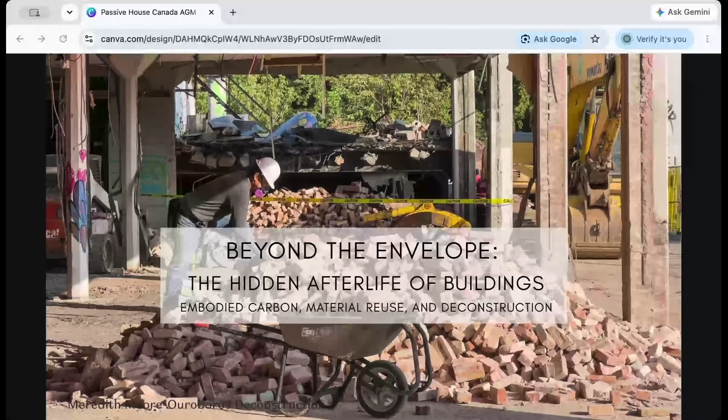I'm Meredith Moore, founder of Ouroboros Deconstruction in Toronto, and we take buildings apart. Most people think that's pretty much the bulk of our work and the most interesting thing, but over the last few years, I've become much more interested in what's happening outside of the deconstruction, what's happening before and after this slow demolition process, what gets saved, what's getting thrown away, and what happens to all of the material and value already embedded within our existing buildings.

So I was excited to speak with everyone today because the Passive House movement has done so much to advance the conversation around building performance and operational carbon. And tonight I want to reframe it a little bit, and talk about a different piece of the puzzle: embodied carbon, material reuse, and the hidden afterlife of buildings.

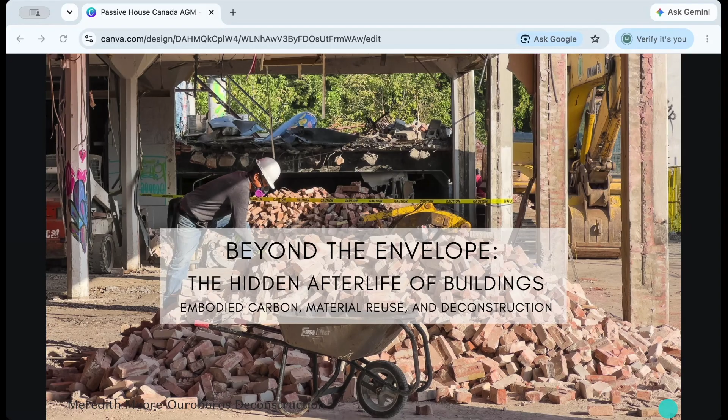So we all know we have a little bit of a problem when it comes to demolition. Commercial demolition is one thing. Residential demolition, which our firm specializes in, is completely different. In Toronto alone, there are about 2,700 residential permits pulled each year, and those are just the permits that are pulled—a lot of work gets done without permits.

To put that into perspective, a single 2,000 square foot home can generate about 140,000 pounds of waste. Much of that is perfectly reusable wood, brick, and other finishes and fixtures. And that 140,000 pounds of waste is equivalent to about how much one person will produce in their entire lifetime.

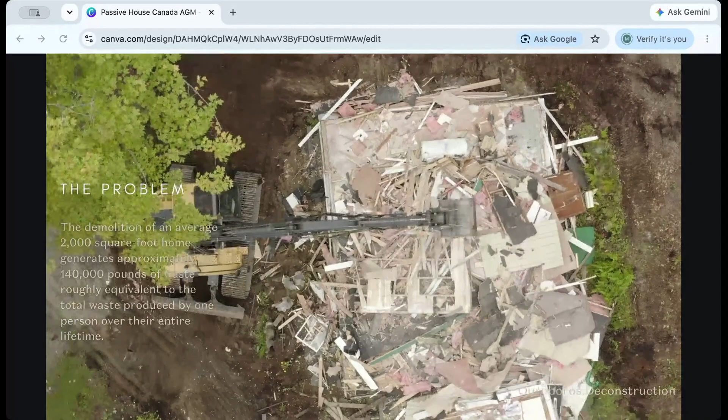While we often focus on the carbon associated with new construction, each demolition project that gets us to that new construction really represents the loss of materials, the labor, the energy—all of this embodied carbon that was invested in the building originally. This volume of waste isn't just economic loss, it's a missed opportunity, and it requires us to use more virgin material.

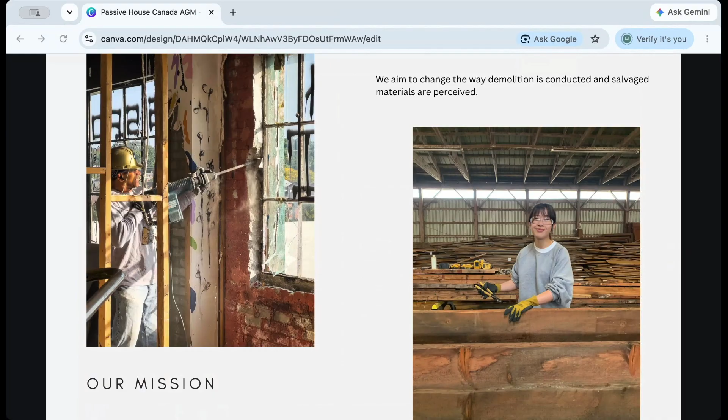In our work, reuse can't be an afterthought. It has to be considered from the beginning of the process.

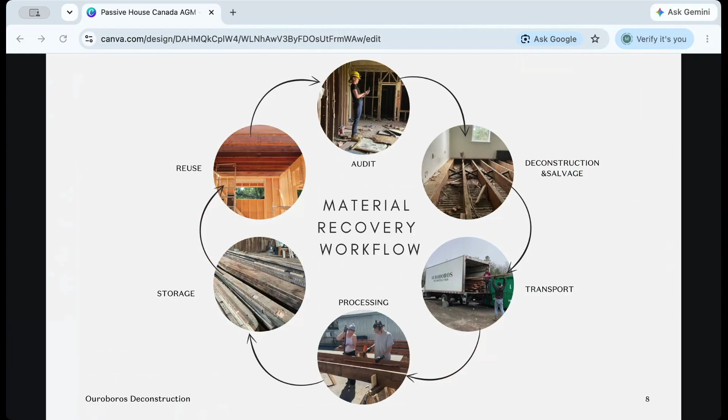We started out primarily doing interior deconstructions, kind of for full guts. Now we've gone on and we've expanded our services to include audits, recovery, material sales, consulting. It really just goes to show that taking the building apart is just kind of the beginning of the whole process.

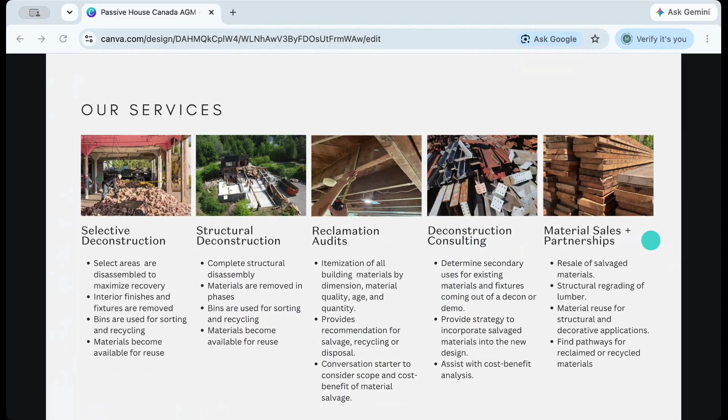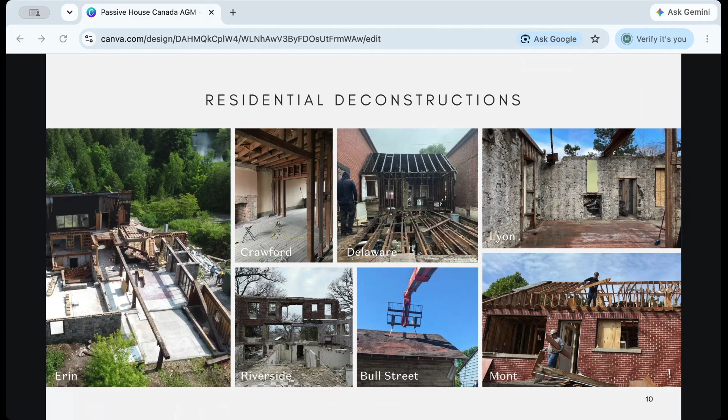More recently, we've started to expand into commercial and institutional projects. Larger buildings, we've learned, just really means more paperwork on our side.

So to give you a better understanding of our process and how all of this really comes together, I want to do a quick walkthrough of a project we did in partnership with Create.to in the city of Toronto.

This became Toronto's first municipally supported deconstruction pilot, and it became a chance for us to test how material recovery could support broader climate goals.

So this wasn't a very big house. It was about 1,600 square feet. 40 plus families lived here over the 140 years that it stood. And it only cost $2,400 to build, which is pretty incredible when it was built in 1884.

The project involved an incredible network of partners across heritage, engineering, carbon, accounting, recycling, and material reuse.

And all of our projects start the same way. We begin with an audit where we document what exists, what we can recover, and where it all needs to go. The audit becomes the foundation for everything that follows.

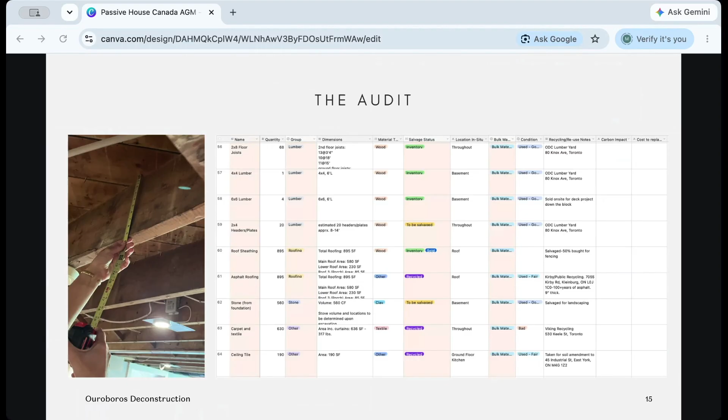Once the audit's complete, we begin the interior strip. That's when we go in and we remove all of our finishes and fixtures. Then any abatement that needs to happen goes through our trained team.

After that, we move into the wall layers, the drywall, or in this case, the plaster and lath, and then the insulation. Because we're taking the building apart in stages, we're able to achieve a much higher recycling rate than you would if it was being done with a machine. Then once all those layers are removed, the structure becomes visible.

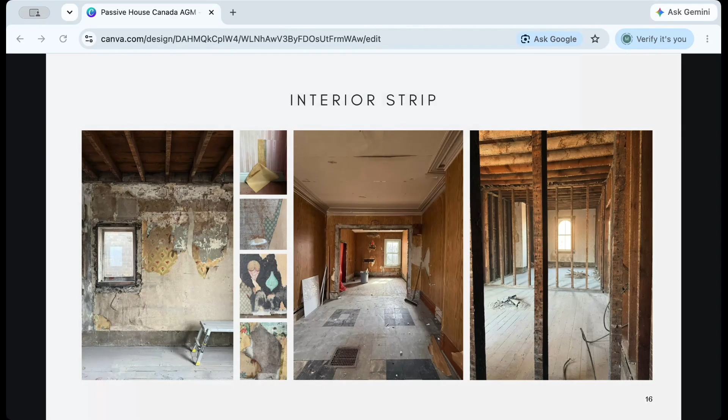Once the structure is exposed, the building starts telling stories. We start to uncover notes and other things, and we're really able to see the lumber package that it was built with. We worked with a gentleman, Zachary Malika, who did a bunch of point cloud studies.

This is a photogrammetry study that was generated from over 1,200 photographs. We were playing around with trying to determine how much we could push the idea of figuring out the lumber package prior to really getting to this point, how much we could anticipate and estimate versus what we would actually have.

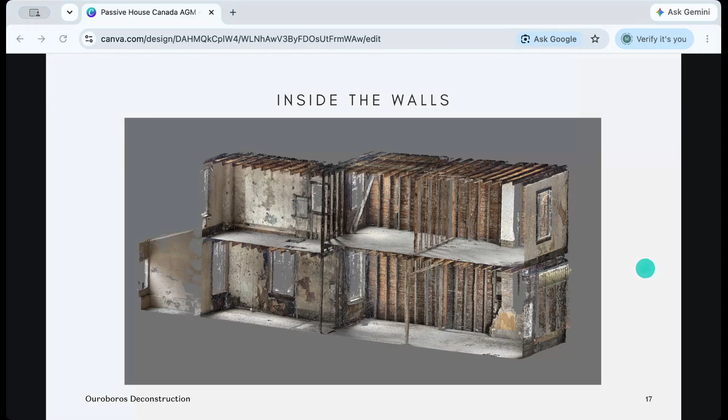Once the structure is exposed, we work our way down from the roof. Materials are sorted, they're processed, and evaluated in real time.

Unfortunately, we can't keep everything, and I'm truly a bit of a material hoarder. If we could, I would, but ultimately the market and our infrastructure are what make those decisions at this point. So any lumber that's a complex assemblage, any spray foam that might have touched stuff, if we know that it's under 6 feet, for the most part, that's all getting recycled.

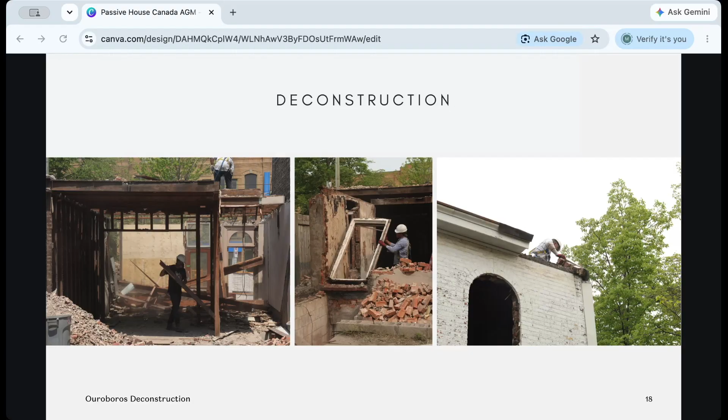The materials are really the driver for all of this and why I got into deconstruction in the first place. Once the buildings come apart, you start to see the actual materials that the city's made from, the old growth lumber, the handmade brick, the millwork. These materials are often difficult or impossible to source today, and we're currently treating them as waste. They're going to bins, they're going to the landfill, and it's really just a loss.

So in our work, one thing that people always ask is where does all this material end up when you're done with these projects? And the answer is everywhere. We have created an incredible network and done a lot of legwork to find secondary markets, people that we know will take this material.

For anyone who doesn't know, drywall is infinitely recyclable. There's a great facility outside of Toronto in Oakville, but they're throughout Canada. I always plug the idea that everyone should be recycling their drywall so that we're not mining for gypsum.

These are the metrics and the data that everyone is so interested in, and they really do matter. We know we had 49.5 metric tons of CO2e avoided carbon from this deconstruction.

We recovered over 12,000 board feet of lumber. We employed, I think on this project, an average of 7 people on site daily for the 17 days we were on site. That was the equivalent of 627 labor hours that we were providing low barrier trade opportunities for people to come in and work. And we diverted 55 metric tons of material from the landfill.

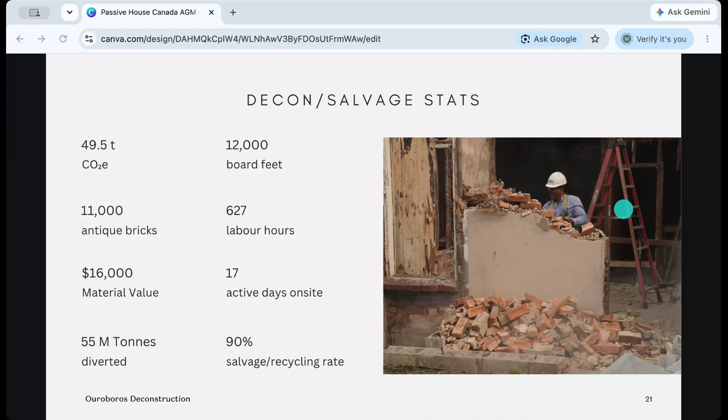We do a lot of documentation around our work so that we can gather data, so that we have a better understanding of material mapping for future projects. Without this documentation, this is really just careful demolition, or slow demolition, as we've been told. But with documentation, reuse becomes measurable and scalable. And for this project with the city, it becomes data points for them to start to think about how certain deconstruction measures and mandates could be put in farther down the road.

Even when we do all this documentation, when we start to do the carbon accounting, we're finding out that these systems are still catching up. Most carbon tools are built around contemporary products, new manufacturing processes, and relatively linear material cycles. But it's really difficult—how are we accounting for materials that were produced in 1884 using entirely different extraction and manufacturing systems than the ones our databases are currently built around? It's really difficult to wrap your head around old growth lumber from trees that may have grown for centuries before they were harvested, and then remained in service for another 140 years, and now we're putting them back into buildings. So current LCA frameworks can capture parts of the story, but they still struggle to represent the complexity of these historic materials that have already existed through multiple generations of use.

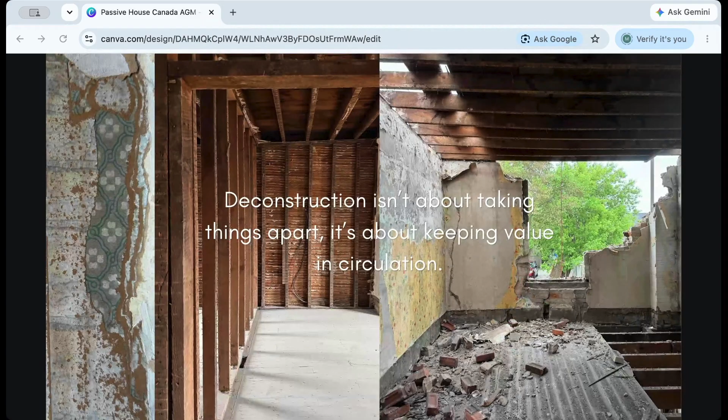So at its core, our work is about seeing buildings differently - not as waste, but as resources already filled with material, labor, and value.

I always put this out there because people generally are interested in wanting to know what they can do. So if you're in design, specify salvage. If you're in policy, rethink permitting. If you're in engineering, rethink grading and certification. If you're in architecture and design, think about design for disassembly. Anyone and everyone can get involved, and this field really needs all of us.